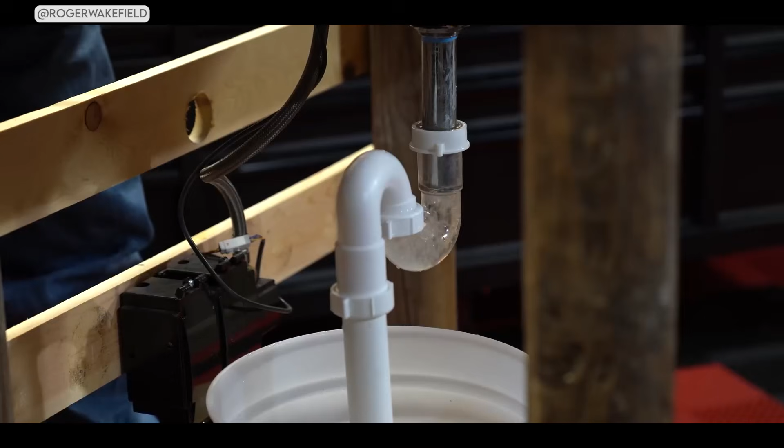If you have an older home, there could be a ticking time bomb hiding under your sink right now, and most people have no idea it is there. Today, I am going to walk you through 5 deadly S-trap mistakes that could be filling your home with dangerous sewer gas as we speak.

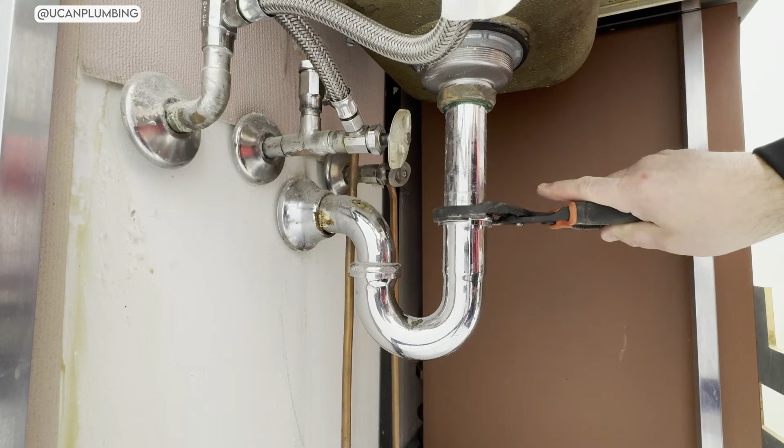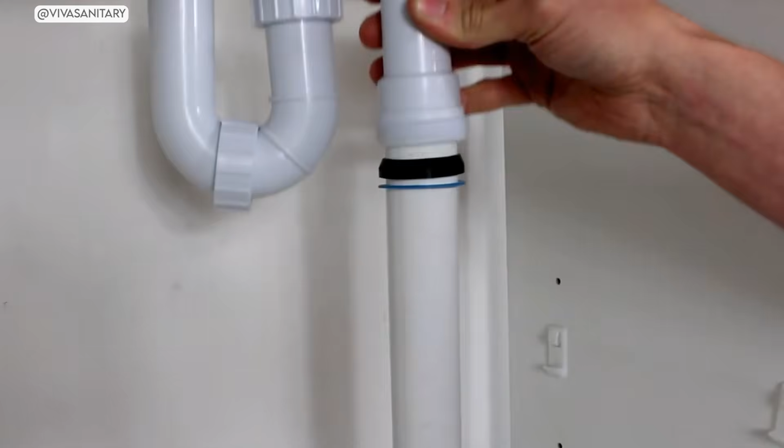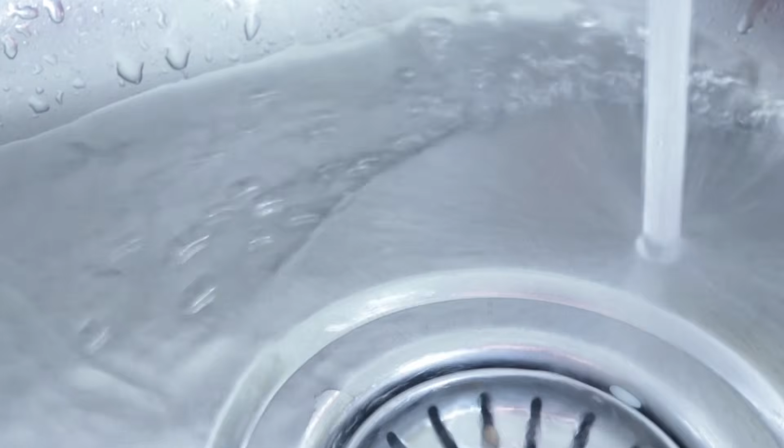After 3 decades of fixing these exact problems, I have seen every one of these mistakes cause real damage to real families. We are covering all 5 today, and number 5 might be the most important one on the list. Plus, stick around for a bonus tip at the end that could save you from a costly surprise.

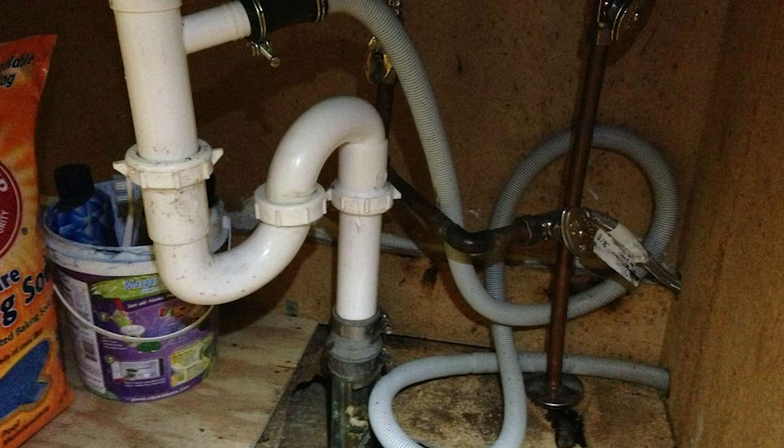The first mistake, and honestly the most common one I see, is not knowing you have an S-trap in the first place. Now, if you're wondering what an S-trap even looks like, you are not alone. Millions of homeowners walk past one every single day without realizing it. An S-trap is a drain pipe shaped like the letter S laying on its side. You will find it under sinks, usually in older homes built before the 1980s.

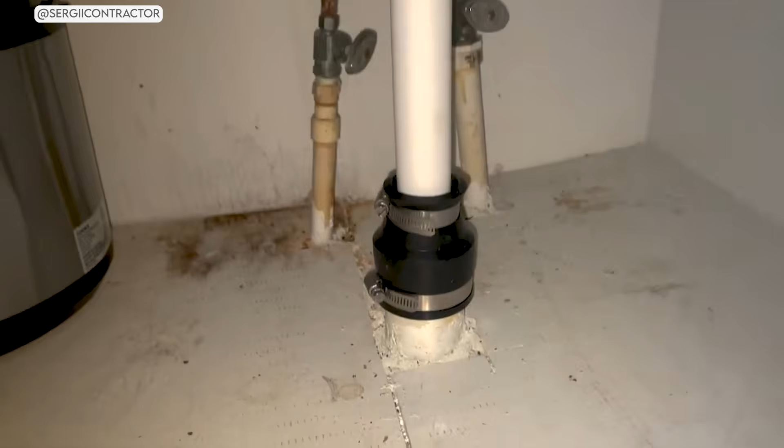But I have also seen them show up in homes that were remodeled by someone who did not pull a permit. The way to spot one is simple. Get down under your sink with a flashlight and look at the pipe coming down from the drain. If it curves down into a U shape, then curves back up, and then drops straight down through the floor,

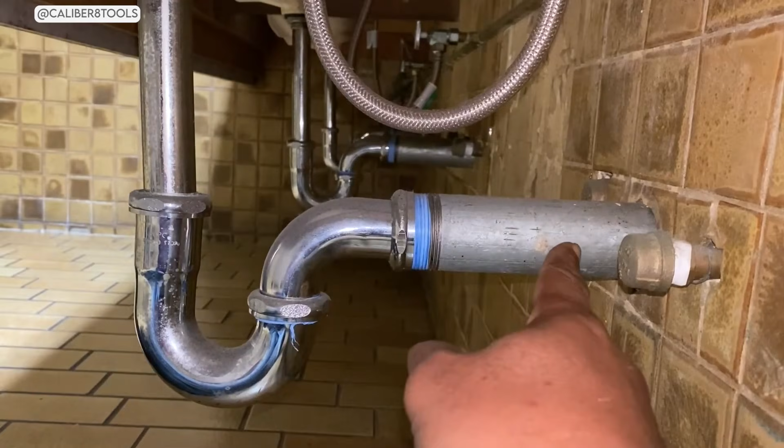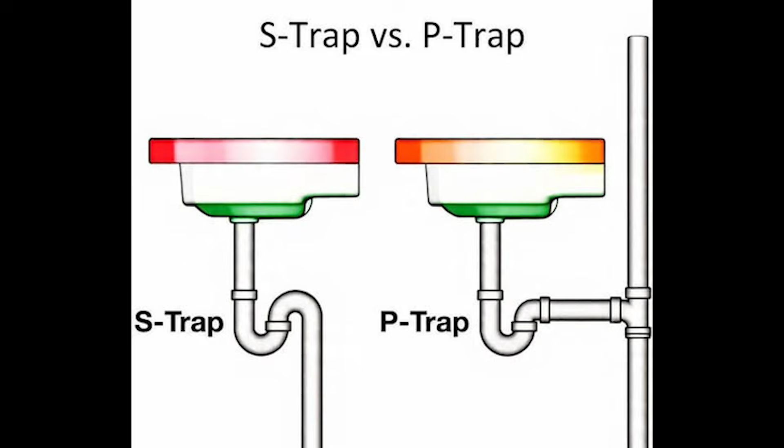that is an S-trap. A P-trap, on the other hand, curves down into that same U shape but then exits horizontally, usually going into the wall. That is the key difference. The S goes down through the floor. The P goes out through the wall. Now, here is why this matters.

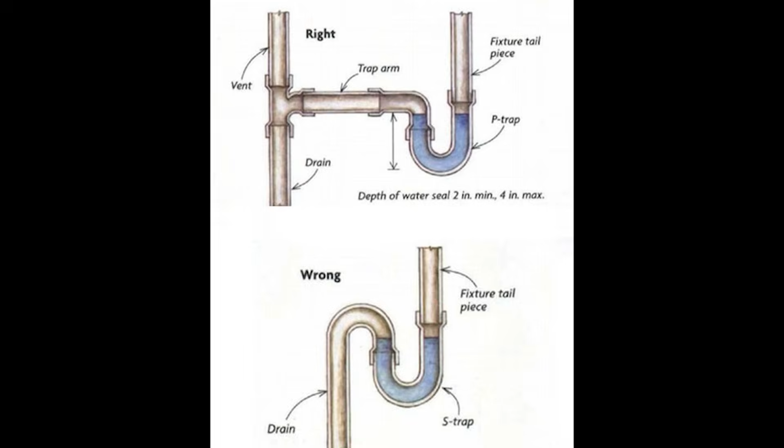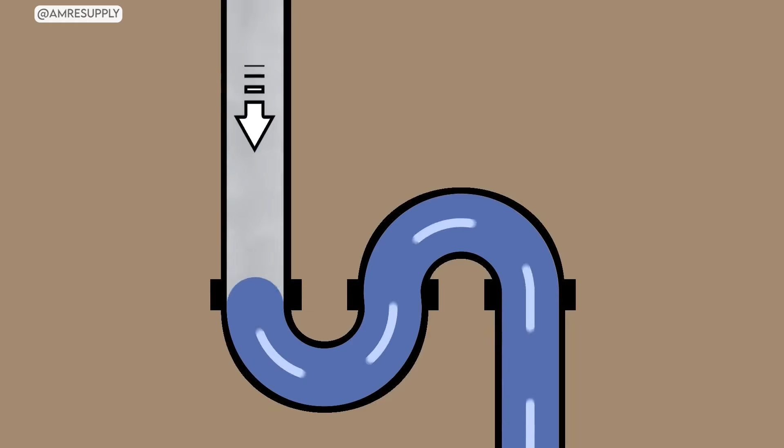Every major plumbing code in the United States has banned S-traps. The International Plumbing Code and the Uniform Plumbing Code both prohibit them because of one critical flaw. They are prone to losing their water seal. That water sitting in the bottom of the curve is the only thing standing between your living space and the sewer gas lurking in your drain pipes.

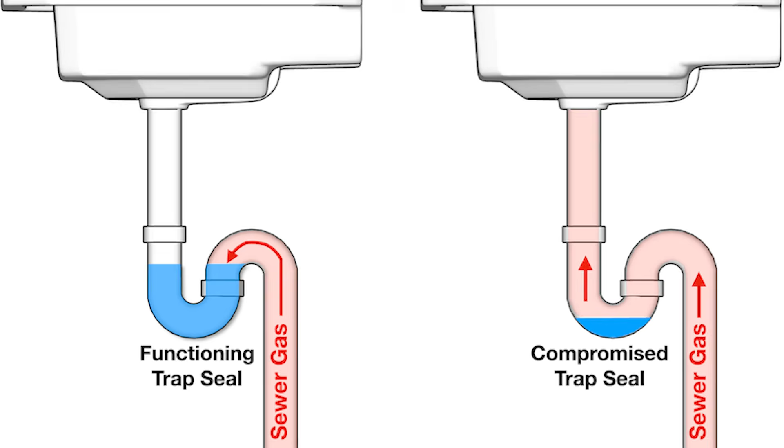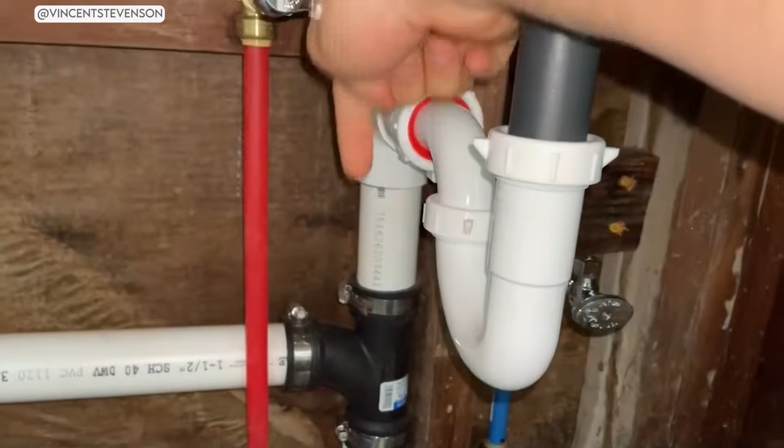When an S-trap loses that seal, and it will, gases like hydrogen sulfide and methane have a clear path right into your kitchen or bathroom. So step 1 is simply getting under every sink in your home and checking. If you see that S shape dropping through the floor, you have got an S-trap, and you need to keep watching.

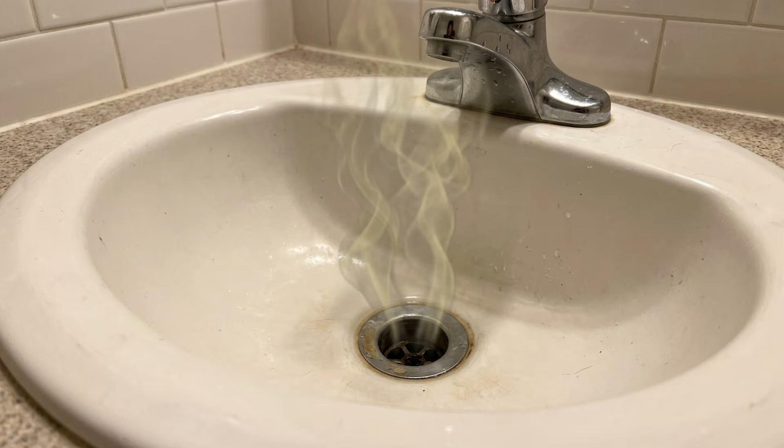The second mistake that puts families at risk is ignoring the gurgling and sewer smell warning signs. I cannot tell you how many service calls I have been on where the homeowner says something like, "Oh, that smell has been there for months. We just got used to it." And that breaks my heart, because what they have been breathing in is actual sewer gas.

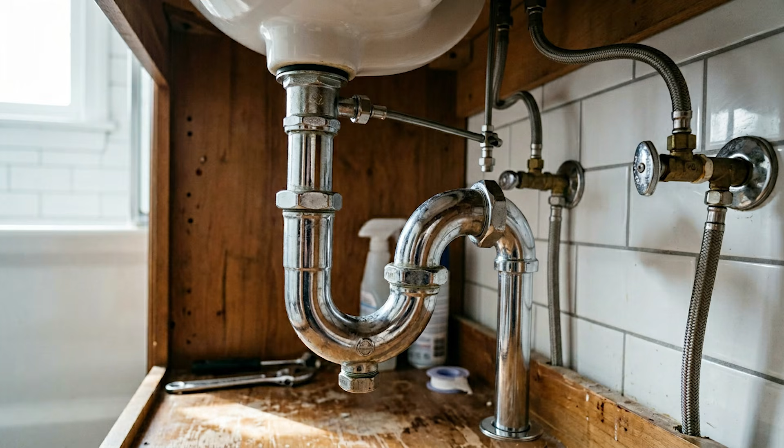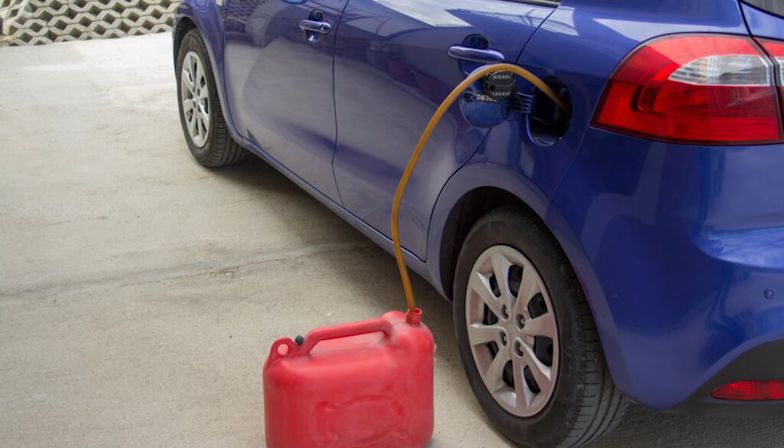Here is what happens inside an S-trap. Every time you run a full sink of water and release the drain, all that water rushing down creates a siphon effect. Think of it like siphoning gas out of a tank. The water flowing through the S-trap pulls the protective water seal right out of the bottom of the curve and sends it down the drain.

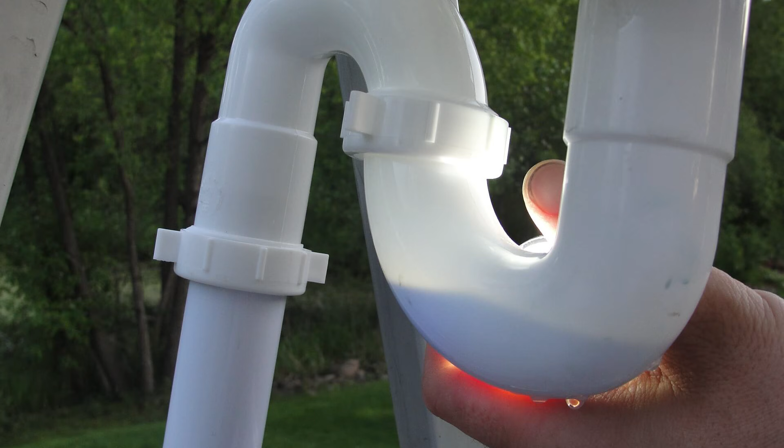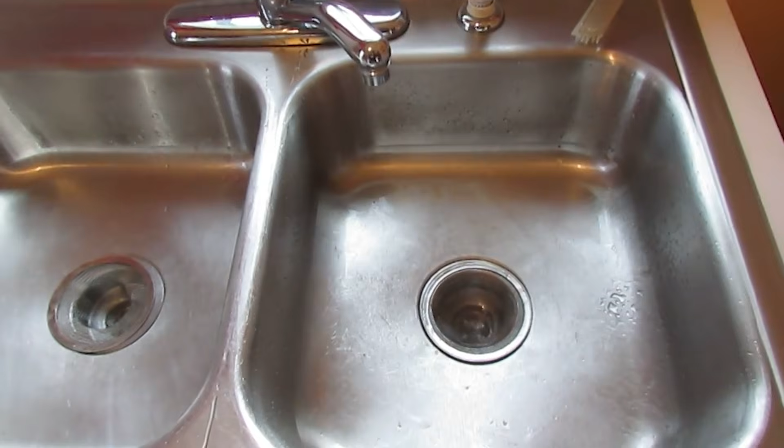Once that seal is gone, there's nothing blocking sewer gas from rising straight up through the pipe and into your home. The warning signs are very specific. First, listen for a gurgling sound after the water drains. That gurgling is the sound of air being sucked through the trap as the water seal gets pulled away.

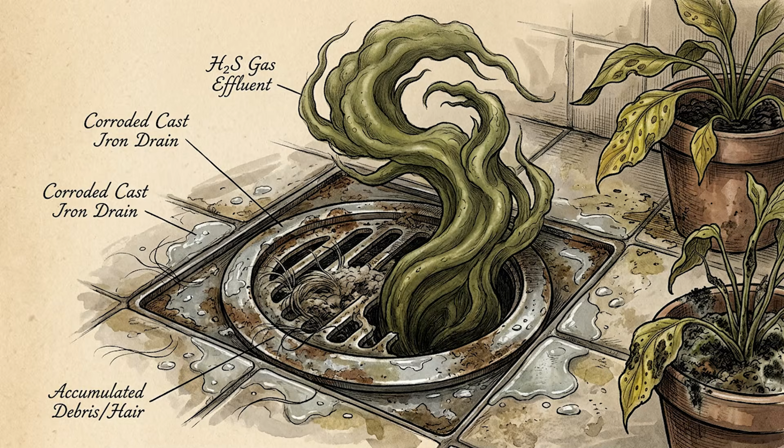Second, pay attention to any faint rotten egg smell near your sinks or drains. That smell is hydrogen sulfide, and it is not just unpleasant, it can be genuinely harmful, especially if you are sleeping in a closed-up house overnight.

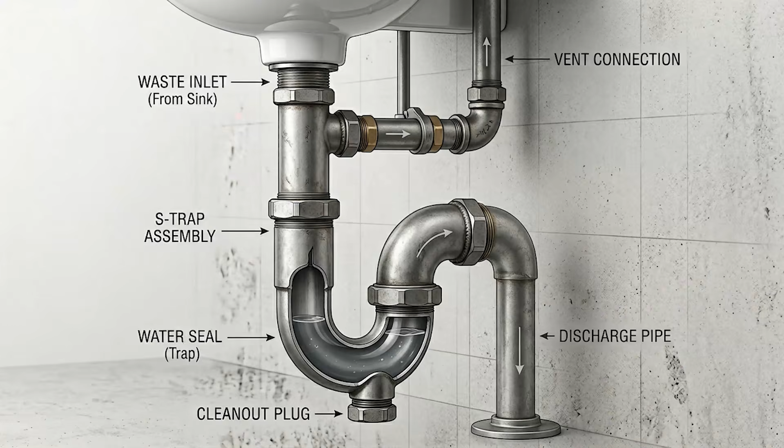Third, if the smell seems to come and go, that is actually a textbook sign of an S-trap losing and partially regaining its seal. Some water trickles back in after use, temporarily restoring a weak seal, but it never holds for long.

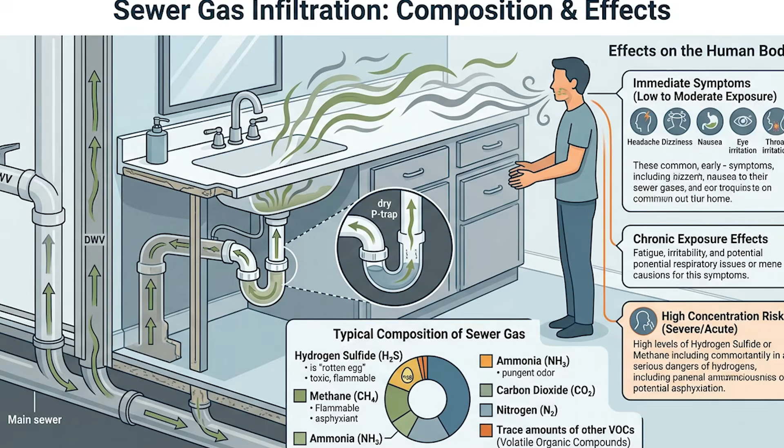The danger is real. Sewer gas can contain methane, hydrogen sulfide, carbon dioxide, and nitrogen. Prolonged exposure can cause headaches, nausea, dizziness, and in extreme cases, much worse. If you are noticing any of these signs, do not brush them off. Your nose is trying to tell you something important.

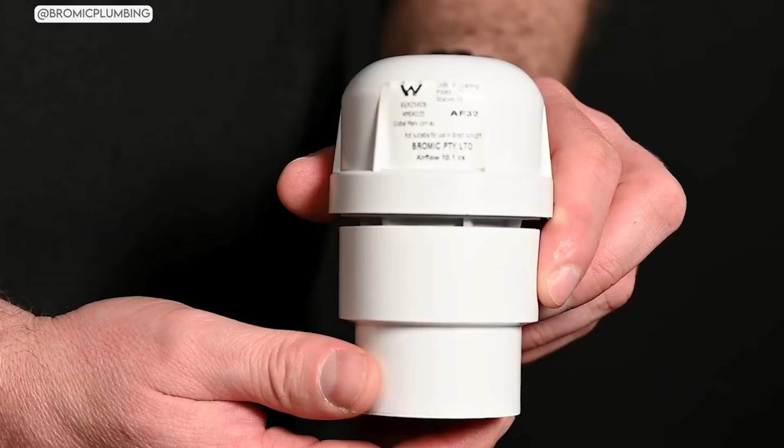The third mistake, and this one drives me absolutely crazy, is converting to a P-trap without adding a vent.

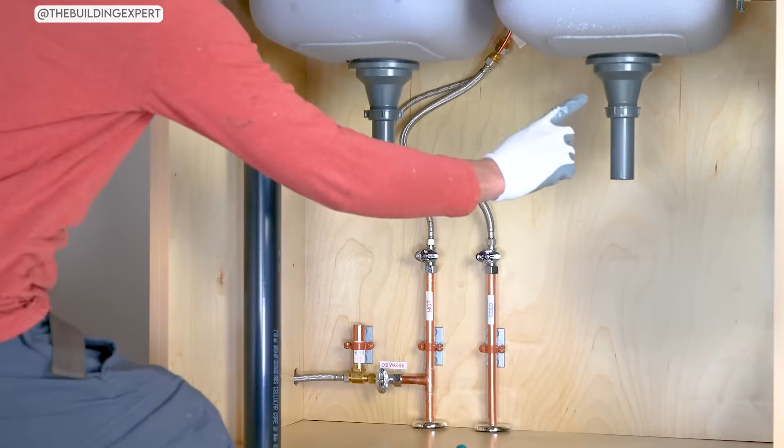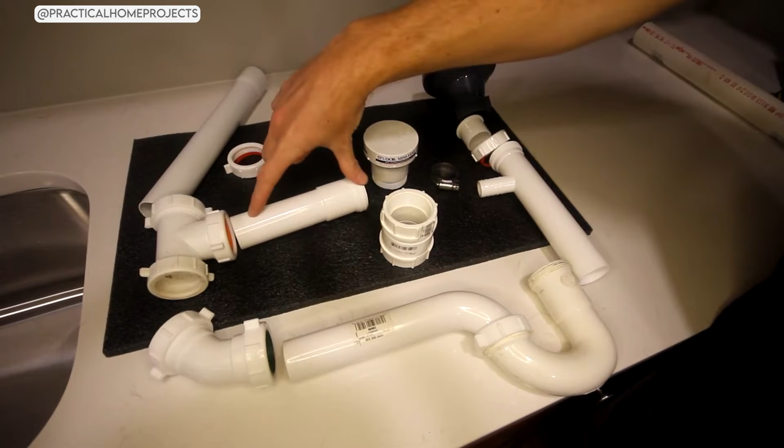This is the number one blunder I see from well-meaning do-it-yourselfers, and I understand why it happens. You do your research, you learn that S-traps are against code, and you decide to fix it yourself. So you go to the hardware store, buy a nice new P-trap, come home, remove the old S-trap, glue on a 90-degree elbow, attach the new P-trap, and feel great about yourself.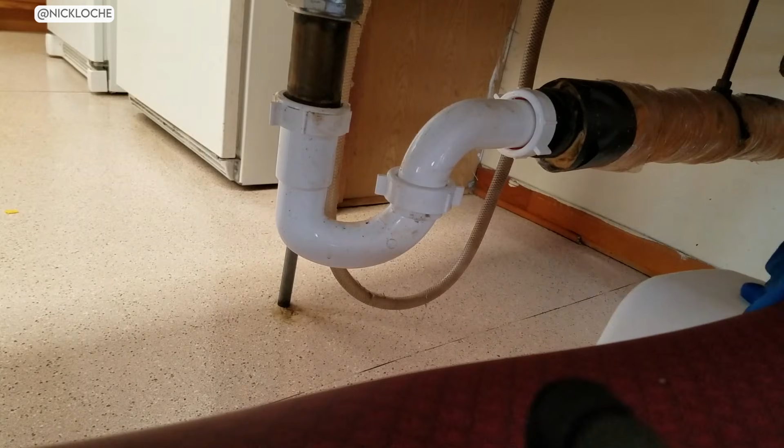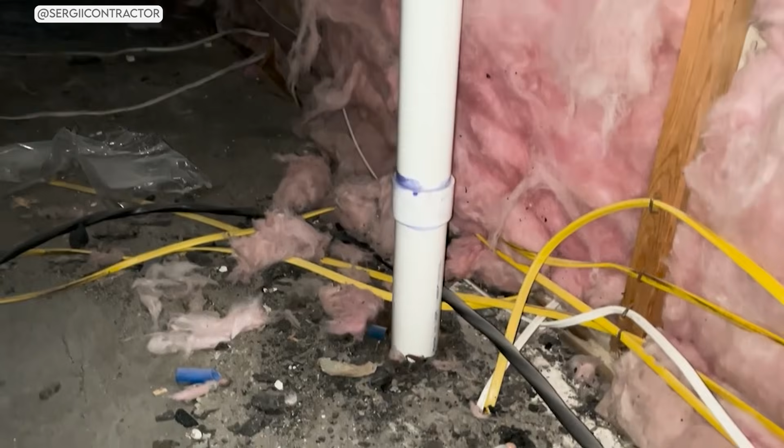The problem is, without a proper vent, you have not actually fixed anything. You have just created what plumbers call an accidental S-trap using P-trap parts. Let me explain why. A plumbing vent is a pipe that connects your drain line to open air, usually running up through your roof. Its job is to introduce air into the drain system so that water flowing through your pipes does not create a vacuum.

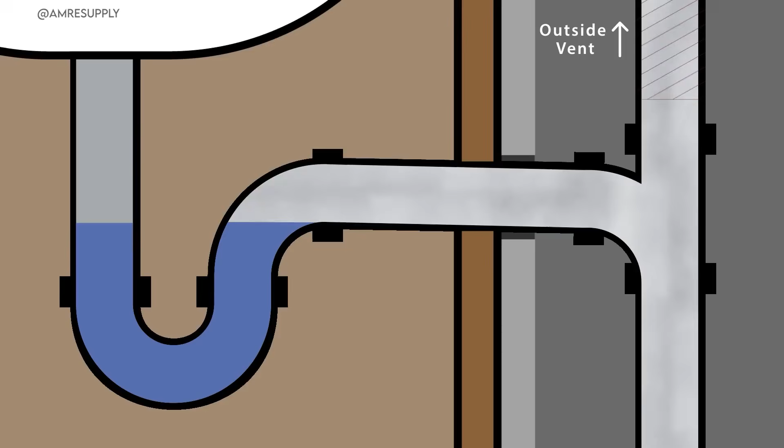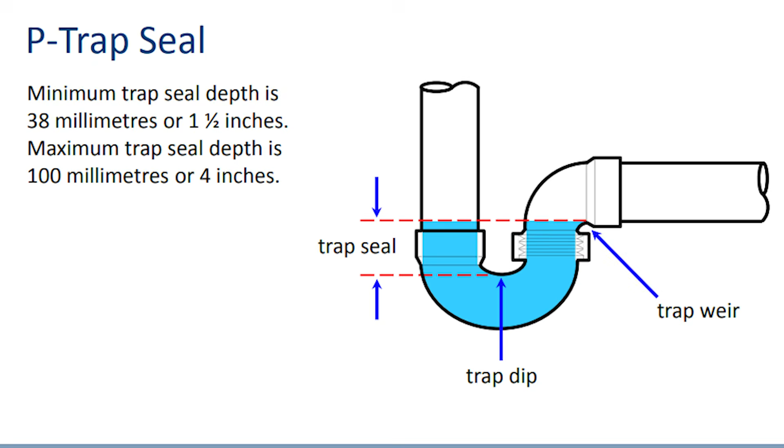Without that air supply, the water rushing through your new P-trap will still create a siphon effect, pulling the water seal right out of the trap, exactly like the old S-trap did. According to the International Plumbing Code, the trap weir, which is the highest point of water in the trap, must never rise above the vent opening. Anytime that rule gets violated, you have functionally created an S-trap, even if the physical parts look like a P-trap.

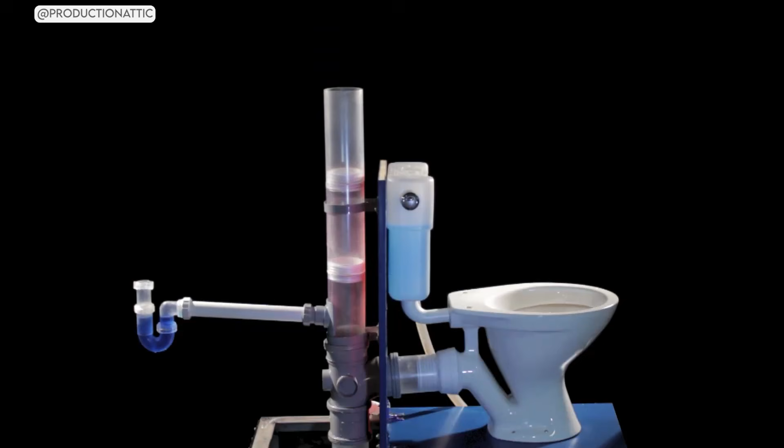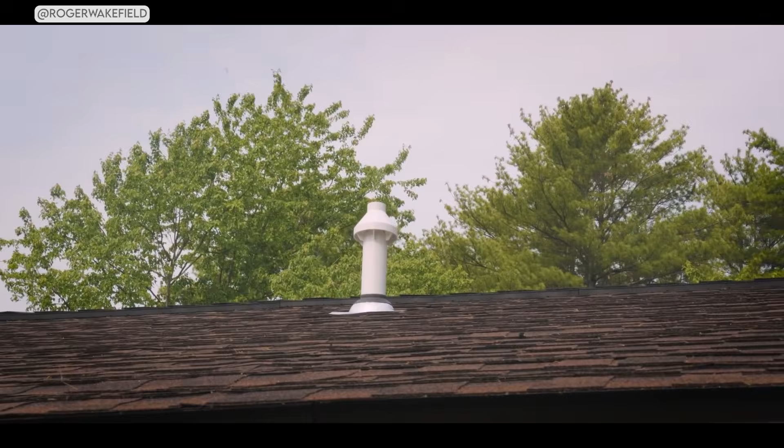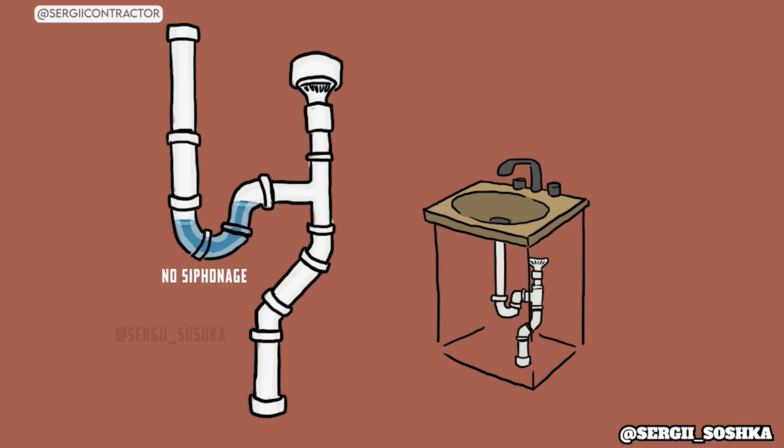So, what is the right way to do this? You have a few options. The best option is to install a proper vent pipe that ties into your home's existing vent system or runs independently up through the roof. If that is not practical because you do not want to open up walls, you may be able to use an air admittance valve, sometimes called an AAV. This is a one-way valve that lets air in but does not let sewer gas out.

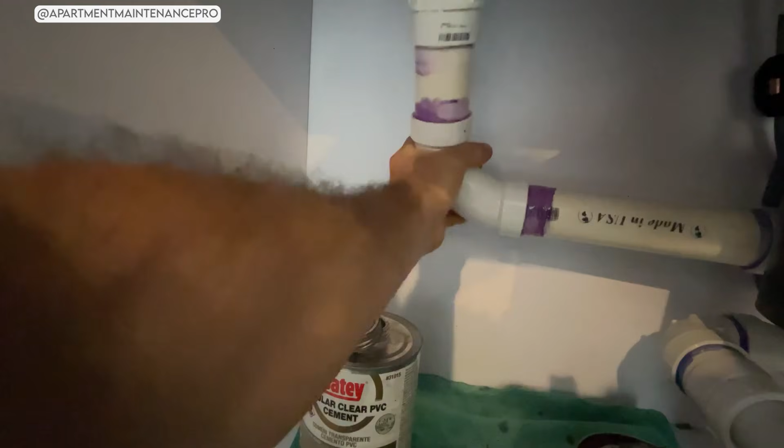But here's the catch. Not every jurisdiction allows air admittance valves. Some states and local codes restrict or prohibit them entirely. So before you buy one, call your local plumbing inspector and ask. A 2-minute phone call could save you from a failed inspection and a complete rework.

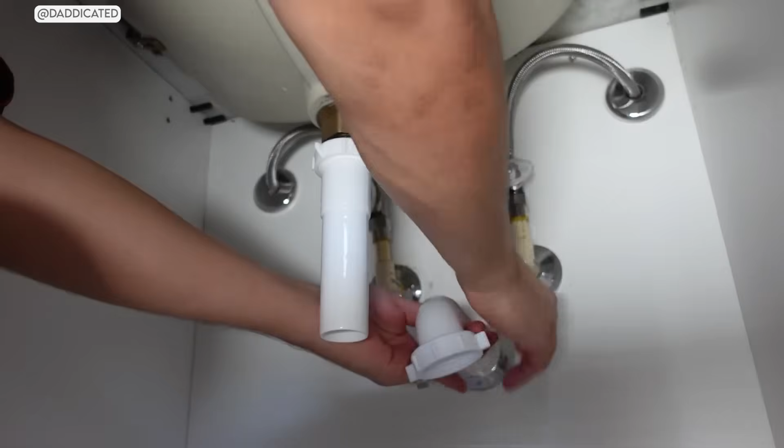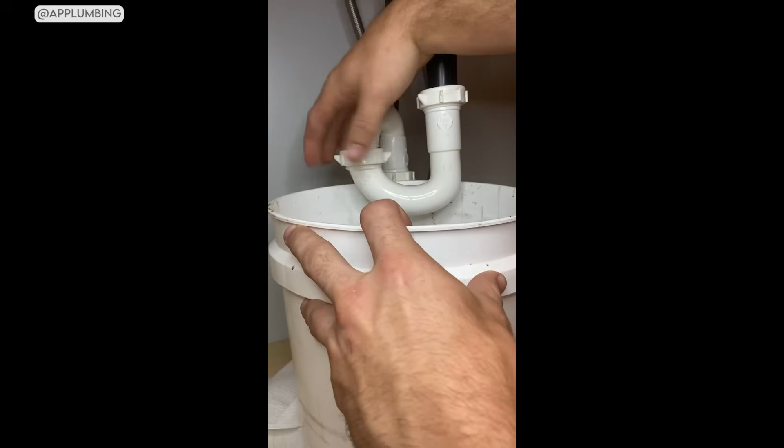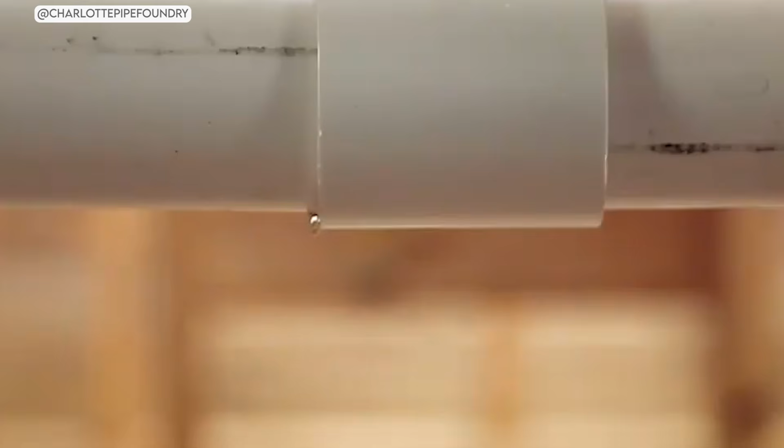All right, let's continue. The fourth mistake on our list is using the wrong fittings or pipe sizes during replacement. Now, this one might sound like a small detail, but in plumbing, small details are everything. I have pulled up under sinks and found 1 1/4 inch pipes jammed into 1 1/2 inch fittings with nothing but silicone caulk holding the whole thing together. That is not a repair. That is a ticking leak waiting to happen.

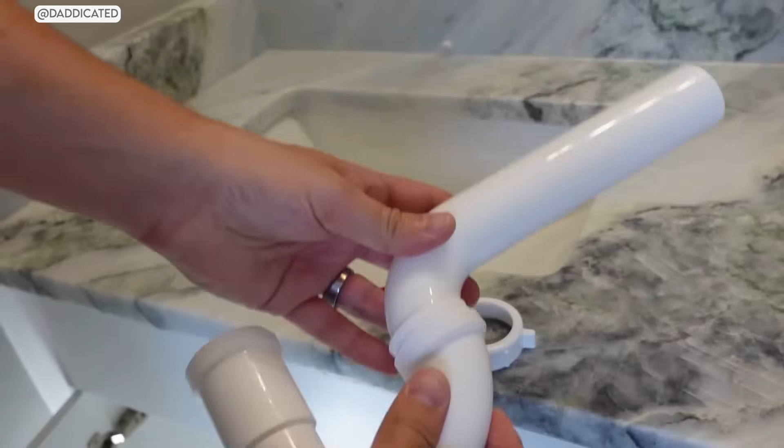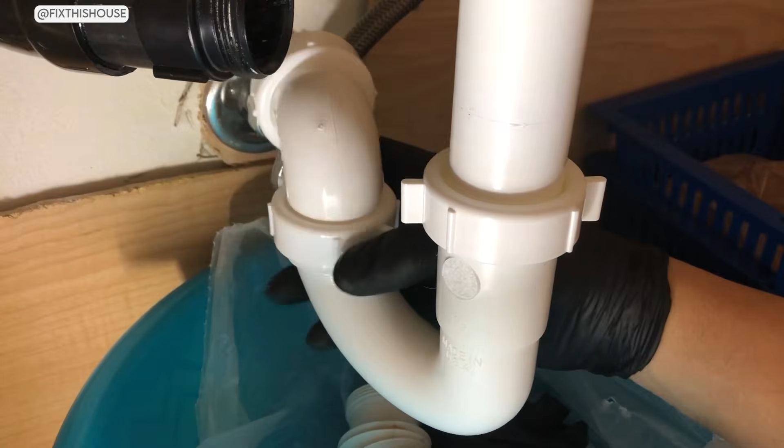Here is what you need to know. Residential drain pipes under sinks typically come in 2 sizes, 1 1/4 inch and 1 1/2 inch. Bathroom sinks usually use 1 1/4 inch, while kitchen sinks use 1 1/2 inch. The trap you buy has to match the pipe size coming out of your fixture and the pipe size going into your wall or floor. If there is a mismatch, you need the correct reducing washer or adapter, not a trip to the caulk aisle.

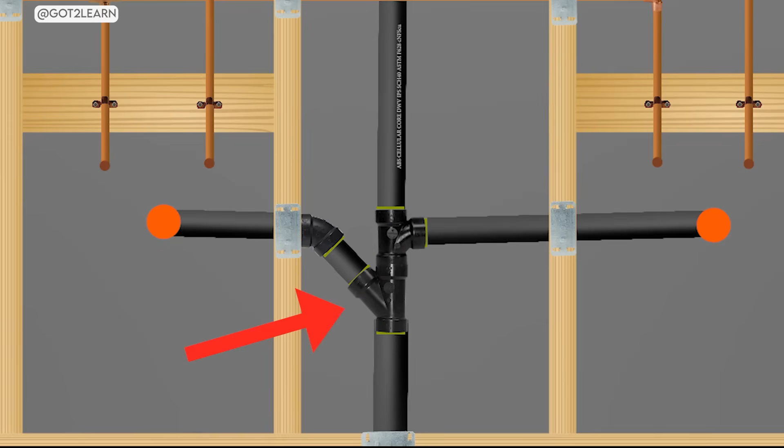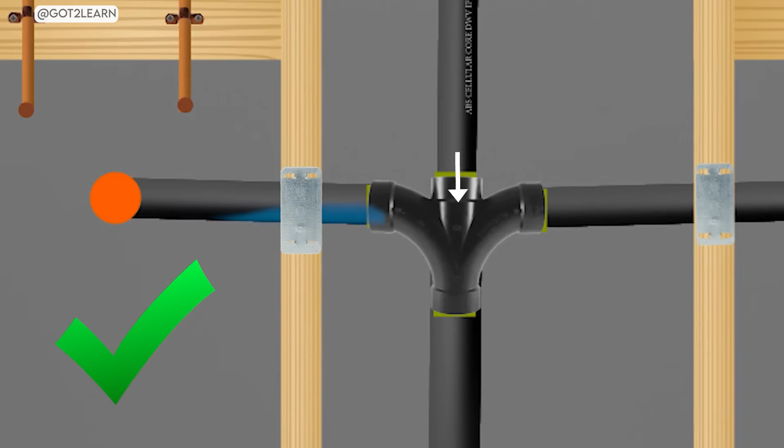Another common fitting mistake is using the wrong type of elbow or connector when redirecting the drain. When you are converting from a floor drain setup to a wall exit for a P-trap, you need a sanitary T, not a standard T. A sanitary T has a gentle sweep that follows the direction of water flow and meets code requirements. A standard T creates a sharp junction that can cause clogs and turbulence, and it will fail an inspection every time.

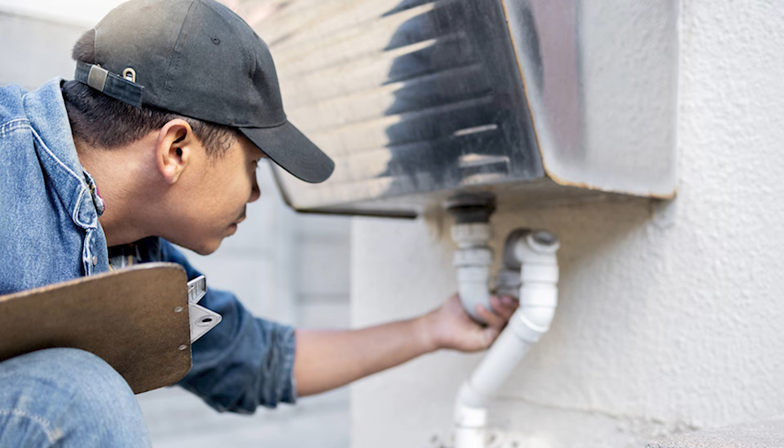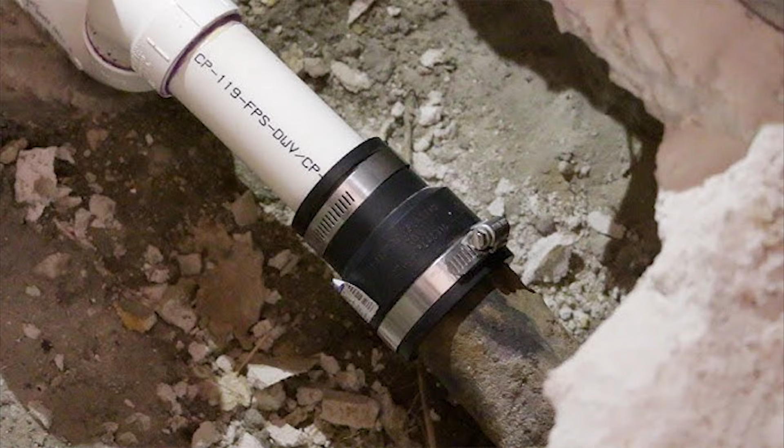Pay attention to the material as well. If your existing drain pipe is old galvanized steel or cast iron, and you are connecting new PVC, you need a proper rubber coupling with band clamps, often called a Fernco coupling. Do not try to force PVC directly into a metal pipe with tape or adhesive. It will not hold, and the joint will eventually leak sewer gas right into your cabinet.

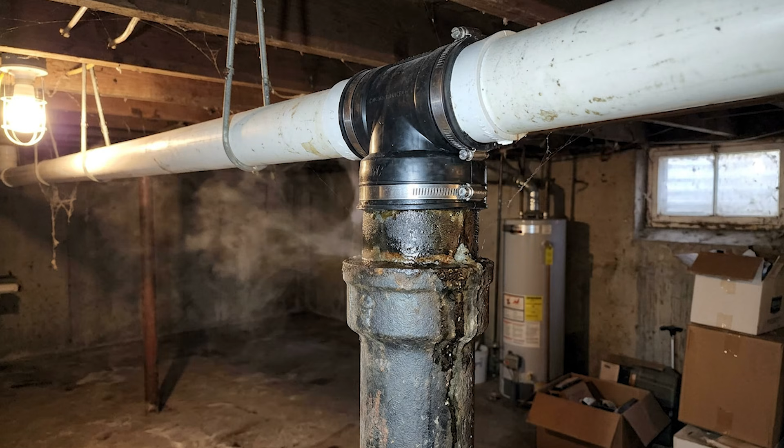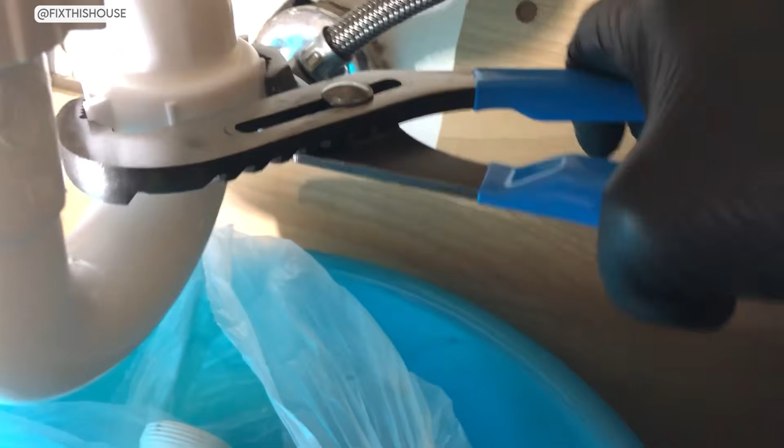One more thing. When you are assembling slip joint connections on a P-trap, hand tighten the nuts first, and then give them just a quarter turn with the channel lock pliers.

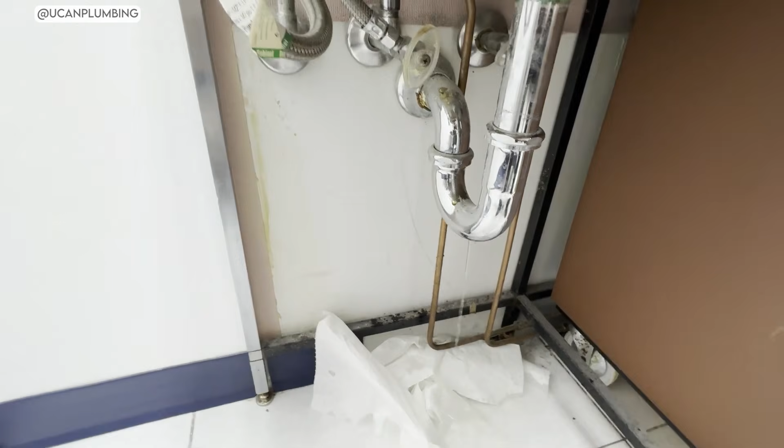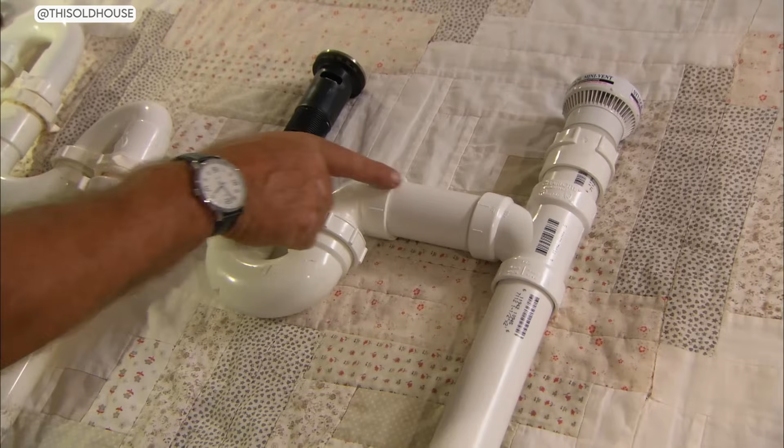Over-tightening is almost as bad as under-tightening. Too much force cracks the plastic or deforms the washers, and you end up right back where you started with a slow drip and a faint smell you cannot quite track down. Take your old trap and fittings with you to the hardware store so you can match sizes exactly. It takes an extra 5 minutes but saves hours of frustration.

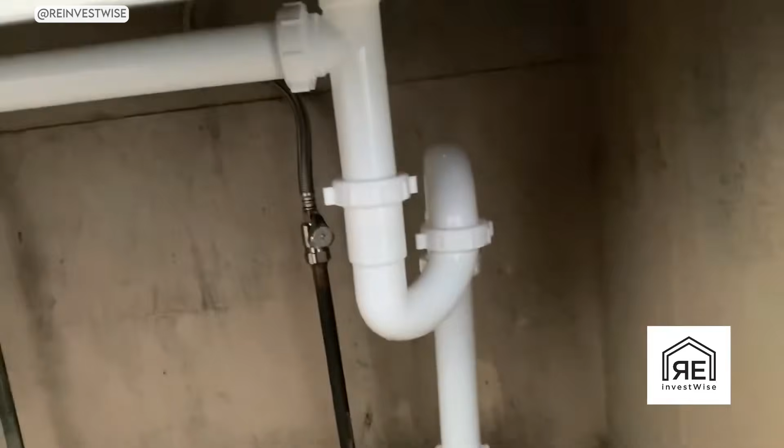The fifth and final mistake is leaving the S-trap alone and hoping for the best. And believe me, I get why people do this. You look under the sink, you see that old S-trap, and you think, well, it has worked fine for 30 years, so why mess with it now? I hear some version of that on almost every job.

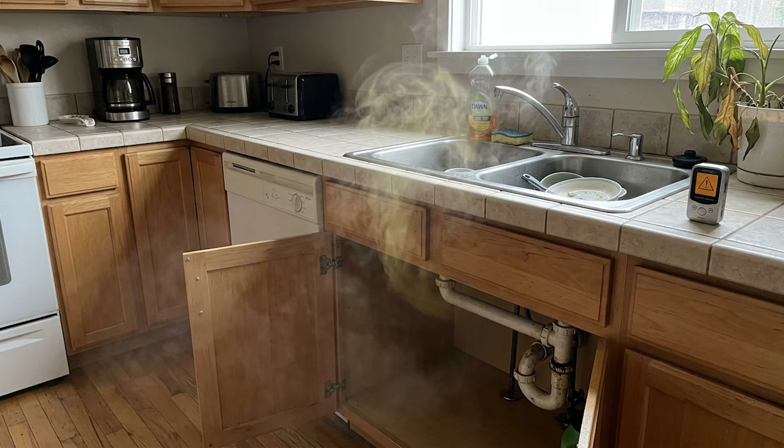But here's the truth. Just because it has not caused a noticeable problem yet does not mean it is safe. S-traps lose their water seal intermittently. That means sewer gas could be entering your home in small amounts that you have gotten used to over time. Your nose can actually adapt to low levels of hydrogen sulfide, which means you stop smelling it even though it is still there. That is a scary thought.

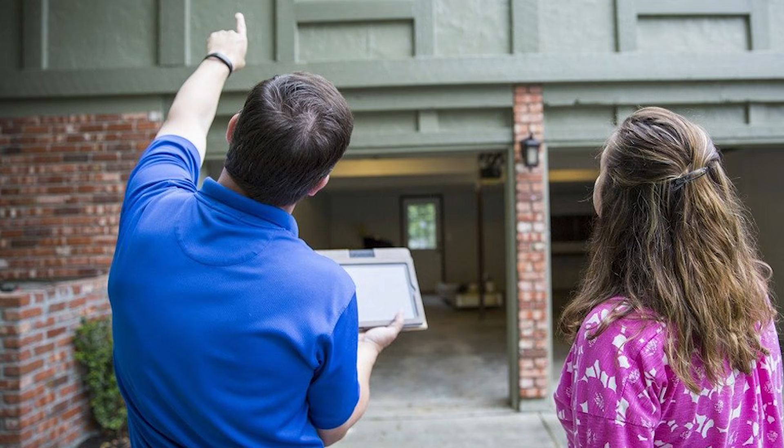Beyond the health concern, there is the practical side. If you ever plan to sell your home, a home inspector is going to flag every single S-trap in the house. It is one of the most common findings on inspection reports, and it can scare buyers away or become a negotiation point that costs you hundreds or even thousands of dollars at closing.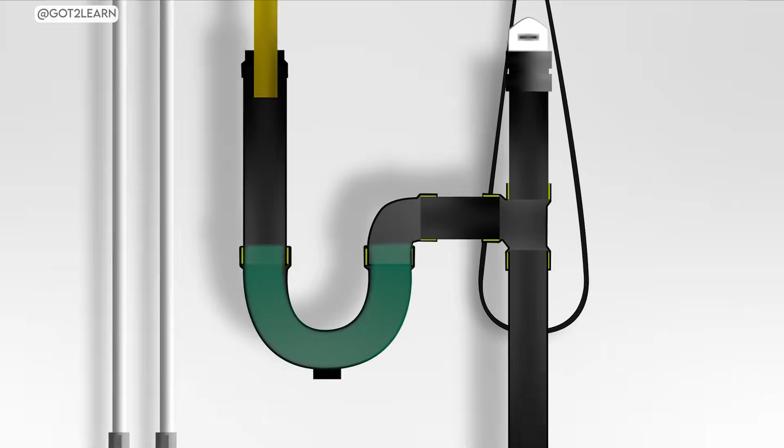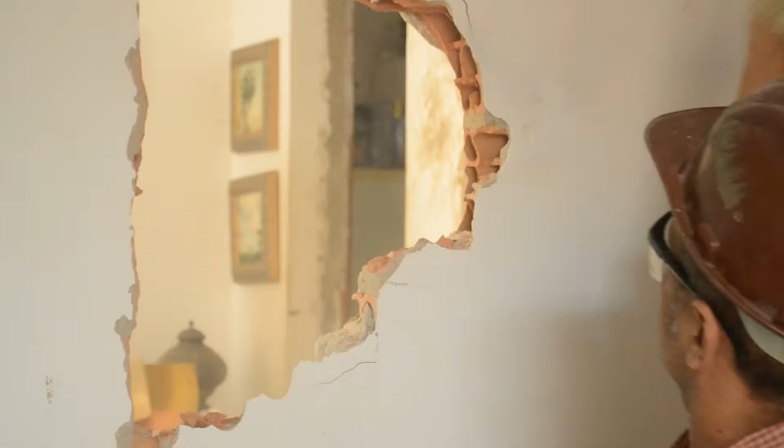Some homeowners think the S-trap is grandfathered in because it was legal when the house was built. And in a sense, that is true. You are not required by law to rip it out tomorrow, but grandfathered does not mean safe. It just means you will not get fined for having it. The moment you do any plumbing work on that fixture, or if your home undergoes a renovation that requires a permit, the inspector will require that S-trap to be brought up to current code.

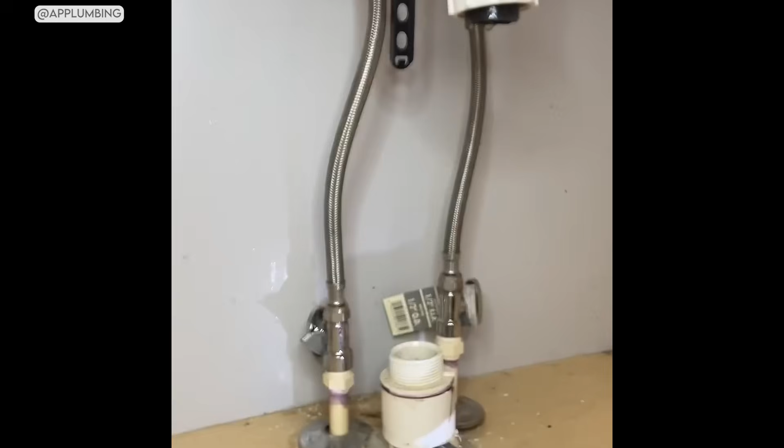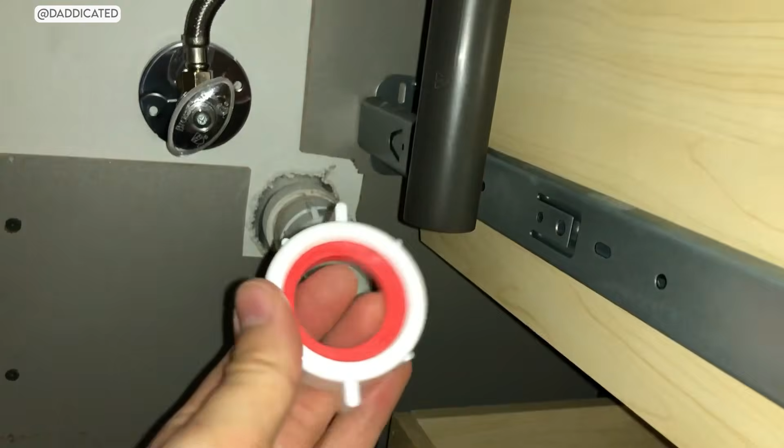So the question is not really whether to fix it. It is whether you fix it now on your own terms and on your own schedule, or whether you fix it later under pressure during a sale or a remodel, when time and money are tight. I always tell homeowners, deal with it when it is convenient, not when it is urgent. You will spend less, stress less, and sleep better knowing your family is not breathing in sewer gas every night.

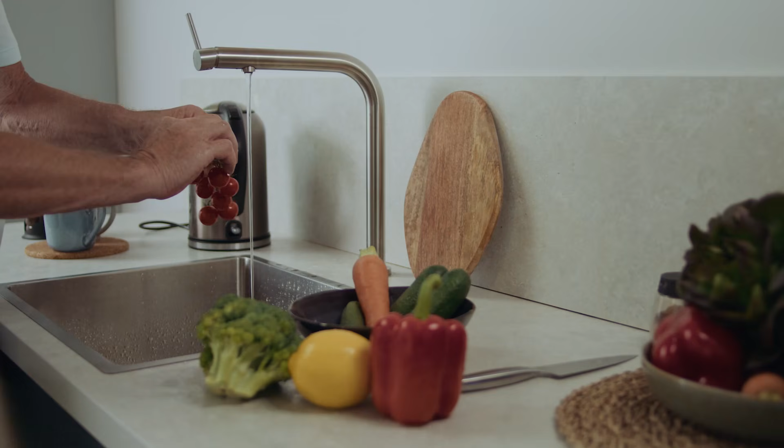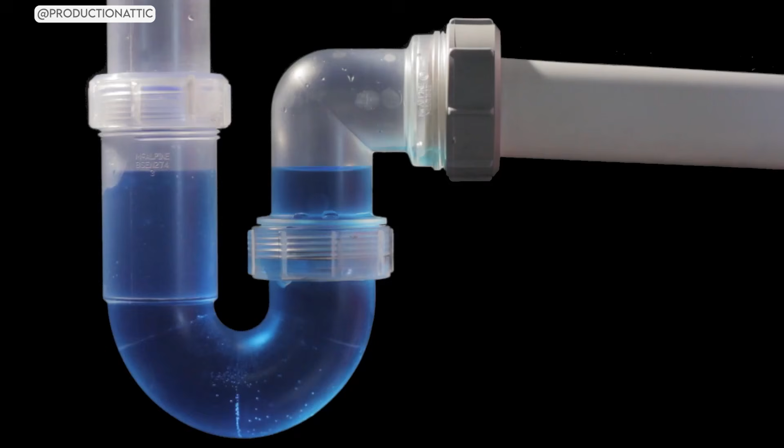And now for the bonus tip that professional plumbers swear by. If you have an S-trap and you are not ready to convert it just yet, there's a simple trick that can help protect your water seal in the meantime. After every time you use that sink, let just a small trickle of water run for about 5 to 10 seconds after the main flow stops. What this does is gently refill the trap seal without creating the heavy rush of water that causes the siphon effect. A slow trickle does not have enough force to pull the water out of the curve, so the seal stays intact.

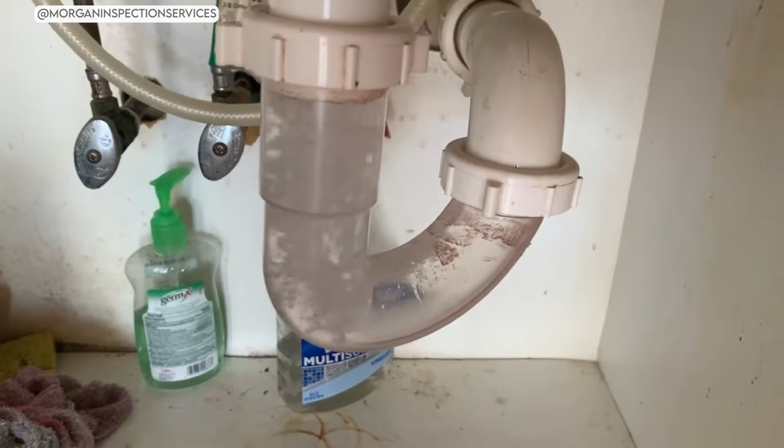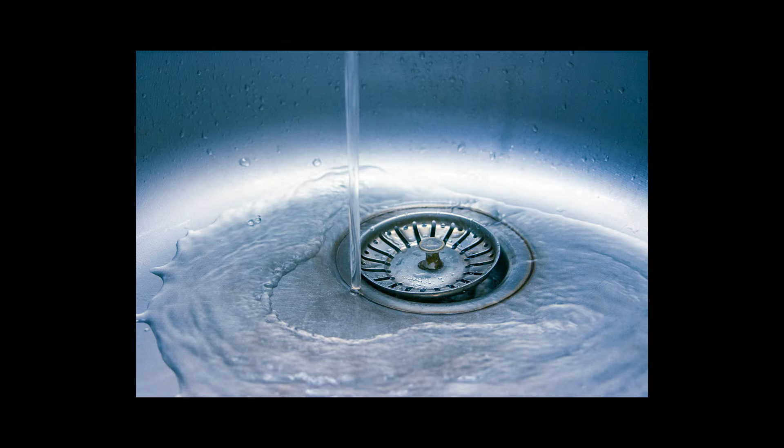Also, if you have any fixture in your home that does not get used regularly, maybe a basement sink or a guest bathroom, make it a habit to run water in every drain at least once a month. A trap can dry out completely in as little as 30 days, especially during winter when your furnace is drying out the air. One small cup of water is all it takes to restore the seal and keep sewer gas where it belongs, in the sewer. It is the easiest plumbing maintenance you will ever do, and it costs you absolutely nothing.